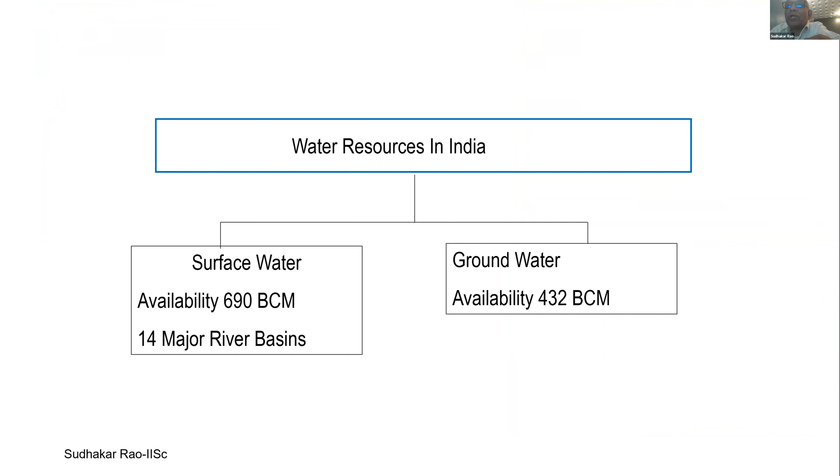So if you look at a snapshot of the water resources in the country, surface water is about 690 billion cubic meters. And groundwater, surprisingly, is touching 432 billion cubic meters. It's almost rubbing shoulders with the surface water consumption in the country. The next slide is much more interesting. Out of 432 billion cubic meters of groundwater, 330 billion cubic meters is used by agriculture, and about 70 billion cubic meters is used by domestic and industry in the country. You would have heard that India is an agriculture-centric country. So much of the water resources goes towards agriculture.

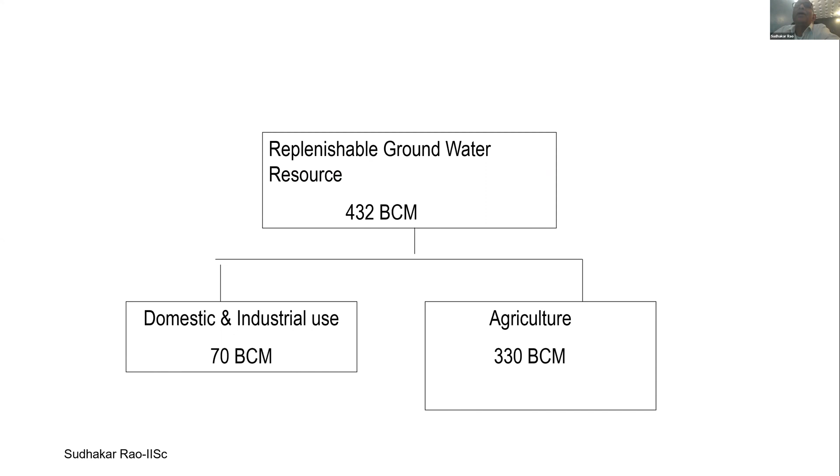Now, I want to focus today's talk on the quality aspects of groundwater. It serves as a decentralized source of safe water, for the reasons I had mentioned, for millions of rural and urban people, and accounts for nearly 80% of rural domestic water needs and 50% of the urban water needs of India. Just yesterday, I saw a snapshot in the newspaper here in Bangalore. It says that more than 200 crore people live in countries experiencing high water stress.

And India, I mean, very sorry to read this, 120 out of 122 countries ranking, we are in the bottommost. And then it says 75% of households across the globe do not have access to drinking water on the premises, and 40% of the people will not have access to clean drinking water by 2030. So besides quantity, I mean, availability of water, quality is also a very important issue. And one of the quality aspects is what I shall be focusing on in my talk as we go ahead.

Now, when we speak of water quality, it has three attributes: physical, chemical, and biological. Physical parameters are color; water is supposed to be colorless. So if there is a bit of a color, you say, oh, the water is not good. Odor; it is supposed to be odorless. And if there is some smell, you feel there is something fishy.

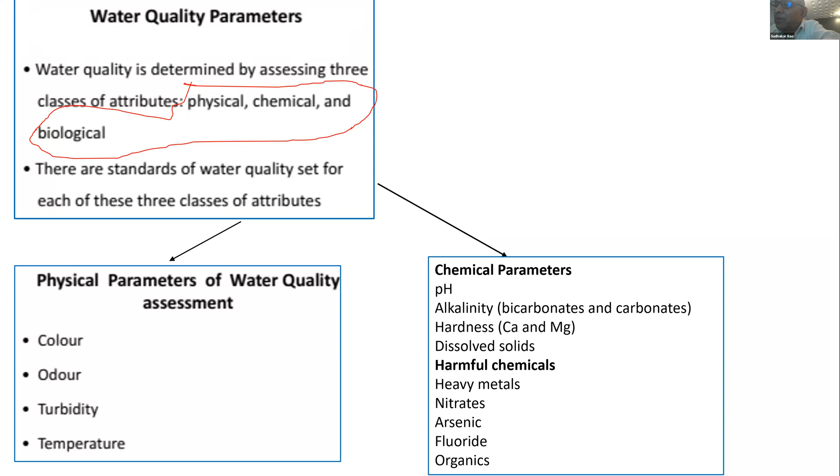Now, just to give you a brief idea, suppose you take a bottle of water, what is it composed of? It is composed of sodium ions, calcium ions, magnesium ions, potassium ions, chloride ions, sulfate and bicarbonate ions. These are mainly coming by the interaction of the water with the lithosphere. It could be the surface soil, or it could be the rocks.

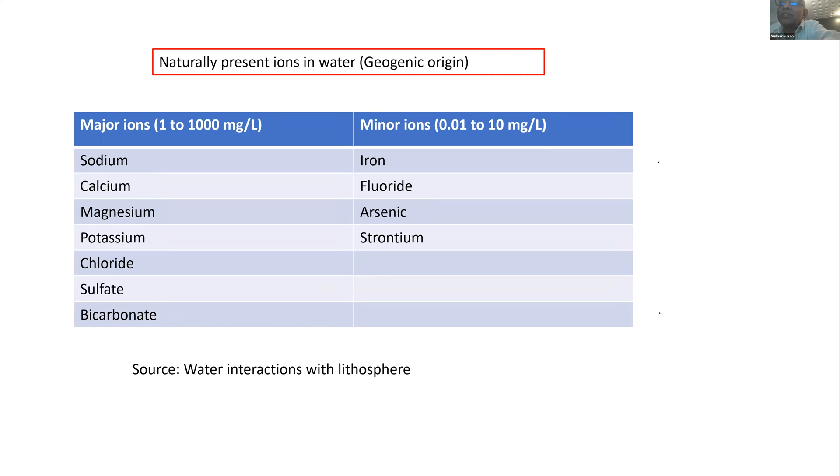And then you have minor ions, that is 0.01 to 10 milligrams per liter: iron, fluoride, arsenic, strontium. A few names are given here. They are very small in quantity, but they are the most problematic. I shall dwell more on this in a couple of slides.

Now, each country has got its own drinking water standard. Most of the countries derive them from the WHO guidelines, the World Health Organization guidelines. In India, we have what is known as the BIS 10500. I have given only a few of the parameters here just to focus on it. There are about 40 parameters, but I'm not listing all of them.

Now, as I go down the table, chloride, calcium, magnesium, sulfate, there are two limits, acceptable limit and permissible limit. The meaning of that is, you would like the water to have this quality, but if there is no other source, a higher contamination could be tolerated. That is the meaning of acceptable limit and permissible limit.

So if you look at, say, TDS, that is the dissolved salt concentration, it says the water should be less than 500 milligrams per liter. But if you have no choice, you can drink water up to 2 grams per liter. That is very, very tough, actually. The lakes and the fresh water and the rivers that we have usually have dissolved salts of about 300 milligrams per liter. So you don't feel the salinity, but sometimes, if you were to travel somewhere, you would feel that the water is salty, and that is because of your dissolved salts.

Now you can look at chlorides, 250 to 1000, very large. Calcium, 75 to 200. And calcium and magnesium are mainly the hardness-causing problems. And then you have nitrate, which is 45 milligrams per liter, and which is my focus of the talk, as this is, in India at least, a recent thing, as to how it is occurring and the implications on health.

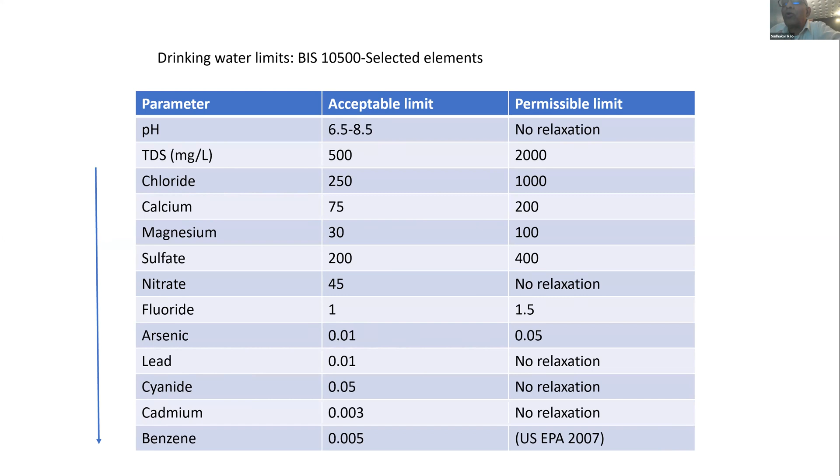Now, what are the sources of pollution of the water? There are two broad classes, as we say: anthropogenic, that is because of human activities, and geogenic, because of the interaction of the water with the rock. Now, if you look at the anthropogenic or human, you have different classes. The domestic pollution, where we dispose our sewage. The agriculture pollution, where you have the pesticides, the nutrients, and the fertilizers. Of course, industrial pollution, many of us are aware of it, disposal of effluents.

And then you have the geogenic variety, that is because of the interaction of the water with the rock. So very prominent examples are arsenic, fluoride, iron, and of course salinity. The nitrate has been wrongly listed here. Nitrate is because of a combination of two aspects, domestic pollution and agriculture pollution. It doesn't come because of geogenic activities. Nitrate in natural groundwater is very, very less, less than a milligram per liter, and it is harmless. But when you have domestic pollution and agriculture pollution, things become bad.

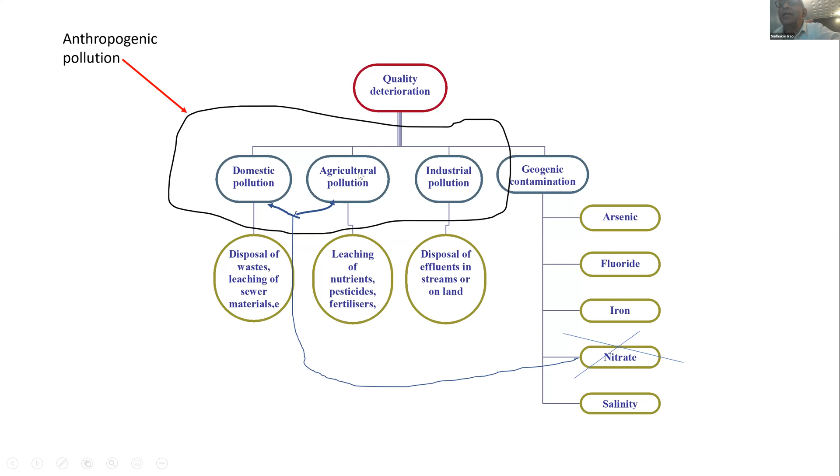So today's talk is on a small town, as I said, Mulabagal. It's about 95 kilometers from Bangalore, not very far. It's a small town, area is about 8.5 square kilometers, and it has been divided into 27 units. And as you can see in the picture on the right, it is like any small town. You have very bad unpaved roads, chaotic traffic, political banners, and so on and so forth. The beauty of this town is it depends on groundwater for its drinking water needs completely.

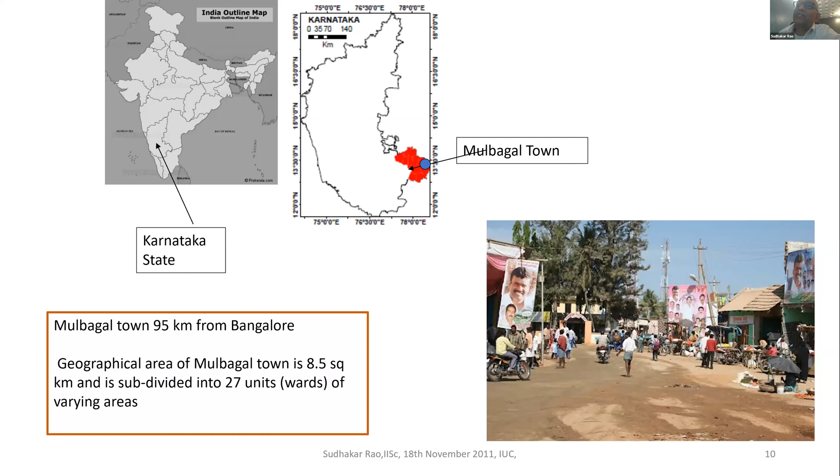There is no surface water, and it has no sanitation that is there in many of the developed nations and the urban centers of the country. That is known as off-site sanitation. I'll come to that. It depends completely on on-site sanitation. I will explain what is off-site and on-site sanitation. So it has got on-site sanitation, and it has got groundwater as the source. Very lethal cocktail, as we shall see in the next slides.

So the town is very small, about 9,000 houses. And there are about 18 slums or shanties, and there are about 10 community toilets. Most of them are non-functional, so open defecation is very rampant. So about 8,000 households have what is known as pit toilets. I will just come to that. Population is about 60,000, so about 5 people per house. And the drinking water that they extract from the groundwater is about 5 million liters per day. So it's a very, very huge number that they're pumping from the ground.

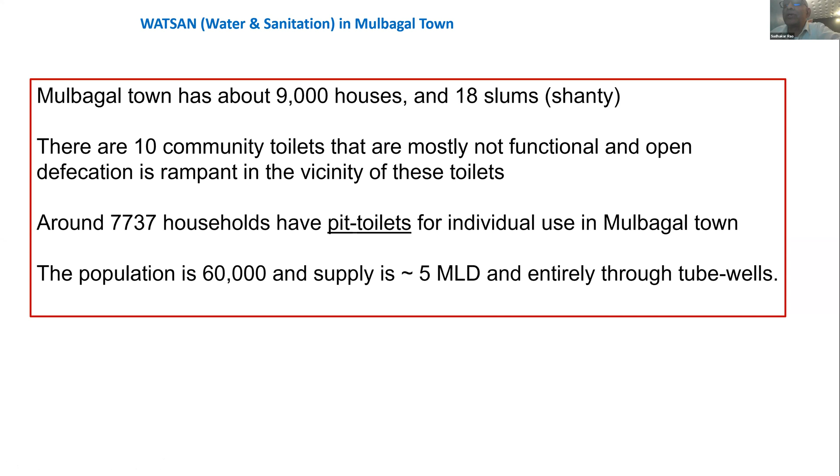Now, I will just try to explain what is off-site sanitation and on-site sanitation. Basically, off-site sanitation means a sewer network that you're aware of, and a centralized wastewater treatment plant. Now, construction of a sewer network needs high investment. About 65% of the total investment is required for the sewers. And this may be a surprise to you, what's new in this, but it is new for many developing nations and for many households in the villages.

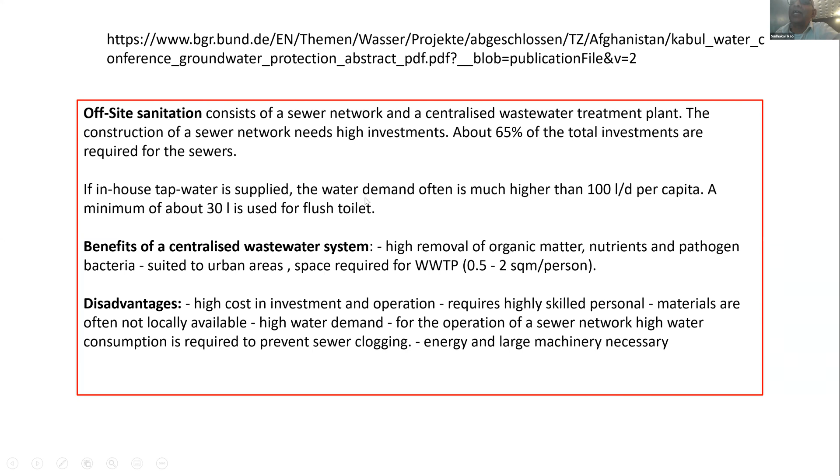If you have in-house tap water, then the demand is about 100 liters per day per capita. That is, in flushing the toilet, we spend about 100 liters per day per person. And minimum flush is about 30 liters per toilet flush. There are of course benefits: high removal of organic matter, nutrients and bacteria. It is suited for urban areas and the space required is about 0.5 to 2 square meters per person. Disadvantages are high cost of investment and operation, highly skilled people, high water demand, and of course large investments and large machinery. And the source is from this website that I have given above. Compared to that, you have what is known as on-site sanitation.

Basically, it means you have a house and you have a toilet and a pit, and the pit is where all the human waste is disposed. So adequate space for locating the toilet and the leach pits, that is the pits from where the waste water will go into the ground.

Advantages: it is simple to construct, operate and maintain, less expensive. I think the government of India has got the Swachh Bharat Abhiyan, and 12,000 rupees is the cost of constructing one such toilet. And the aim of the government is to see that open defecation is completely wiped out. And I think as of today, about 90% of the country is covered by this pit toilet system or the

on-site sanitation facilities. Of course, the disadvantage is the possibility of pathogens leaching into the groundwater and contaminating it, because you're dumping the waste in the ground, you're not treating it. So you are, of course, going to contaminate it, as we shall see in the set of slides.

So most popular are the twin pit toilets, that is, you have two kind of holes. If one gets filled, you flush it and connect to the next. That is what is done. Or you can have a septic tank. That's popular in many countries and many places.

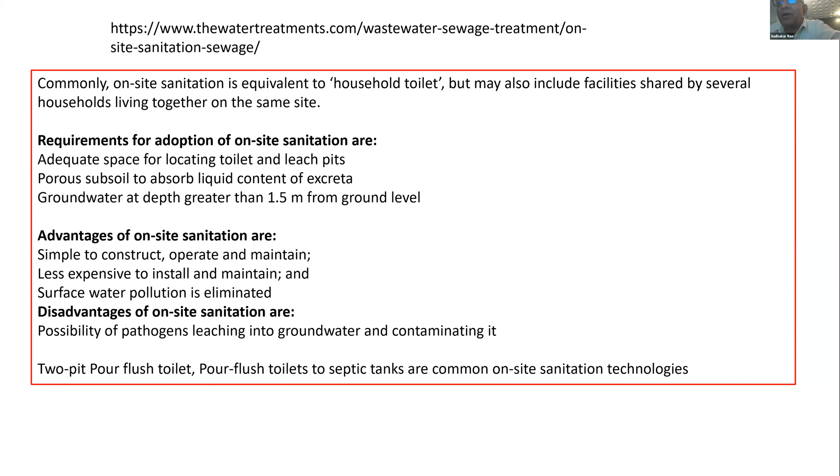So as you can see here, pit toilets not only in India, but serve about 1.77 billion people around the world, and they use pit toilets as a primary source of sanitation. As you can see here, you have the toilet and you have got the pit. The human waste is dumped here. The solids will remain and the liquids will sort of flow. And then you have got the aquifer, and it has got a possibility of getting contaminated.

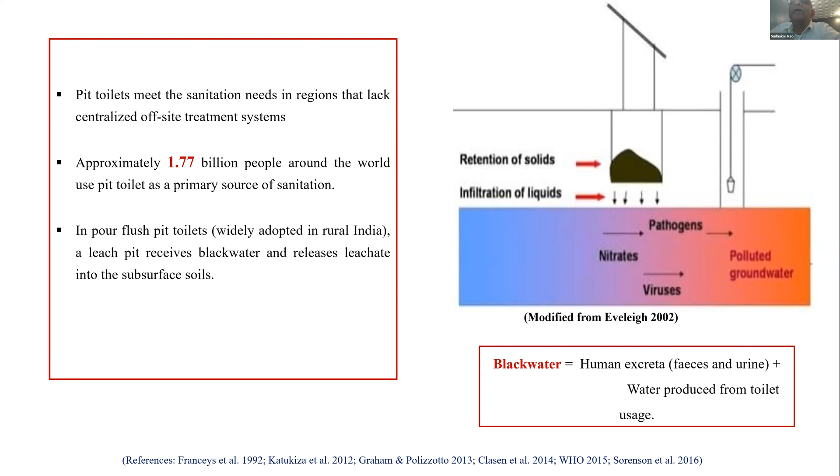Now, black water is basically human excreta, that is the fecal matter plus urine and the water that we use for flushing. So again, more elaboration on that. Contaminants released from the leach pit. As you can see, the flow lines flow from the leach pit and eventually hit the groundwater. And that is our problem.

And that is the problem that the country and many countries that have this kind of system are facing, whether it is Africa. And also, surprisingly, you have parts of North America, you have parts of Europe, where you have isolated communities and they depend on this. And then you have this problem that they're also facing.

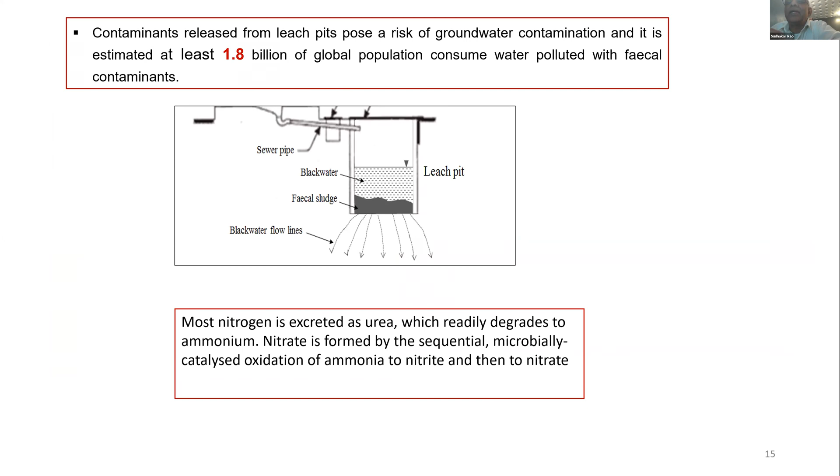And this water, the people are very, very, very smart, resourceful. So the government has spent a lot of money in putting these tube wells inside the town. There is a very high density. I don't have the number, but it's several hundreds of tube wells they have put. Practically every street or every alternate street has got a tube well. Now what has happened is a lot of money has gone into pumping and putting these tube wells.

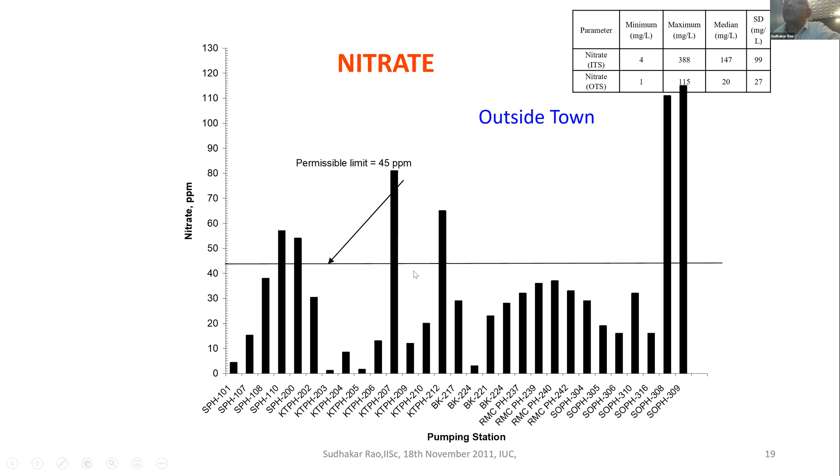So you can see that outside the town, it's not bad. It is less than 45 milligrams per liter for many of the wells. But when I come to within the town, you see it's so high. 45 is here. Many of the wells have crossed the limits for the drinking water inside the town. So of course, when we started the project, this was funded by one of the groups known as Arghyam. They were doing the water management for this particular town, and they approached me to say, let us look at the water quality.

So their suspicion was, this is close to the Kolar district. You must have heard of the Kolar gold fields, some of you. It's close to a zone which is known for fluoride. So they were suspecting fluoride in the water, and they said, let us check if there is fluoride in the water. There's no fluoride, but there's a lot of nitrates and E. coli, which was a big surprise for them and for us.

So this study was a part of the support that was given by the Arghyam Foundation to look at the groundwater quality of that particular town and groundwater management. That was the focus of this 3-year project. And once you get interested, of course you start looking into it, you put your PhD students onto this, and some very wonderful research comes, as I will be sharing with you.

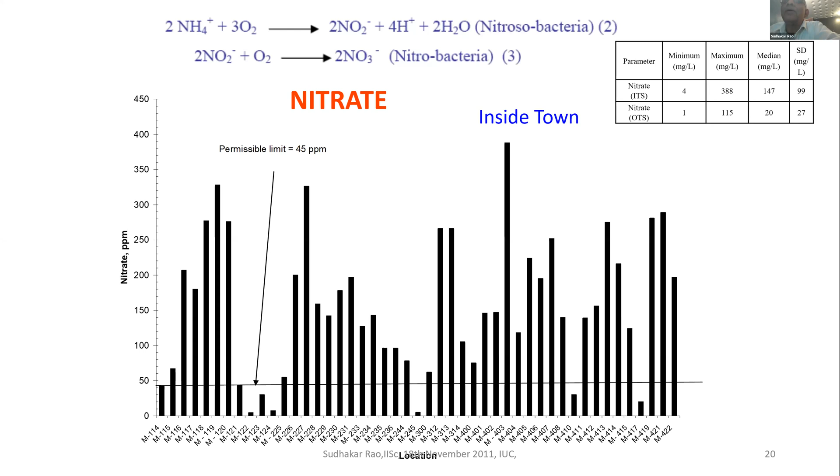Now, you discharge black water, but how does black water get converted to nitrate is a question mark. So the human waste contains a lot of organic nitrogen, and there are two kinds of degradation process. Anaerobic, in absence of oxygen, and aerobic, that is the oxidation that takes place in presence of oxygen. So when the human waste is dumped in the pit, there is no oxygen there, and the organic nitrogen gets converted to what is known as the ammonium ions.

So I will come to this point. When the black water is leached into the subsurface soil, you have got oxygen, and it will oxidize to form nitrate ions. Now the specialty of nitrate is it is very weakly absorbed by the soil particles. There are two reasons. One is the soil particles are negatively charged, so they have an inherent repulsion for the anions, and the anions will go through unless there is strong complex formation, like sulfates and phosphates bound to clay minerals. But anions like nitrates and chlorides easily pass through the soil particles because they don't have a specific bonding mechanism with the clay particles, so they simply travel through.

That's why chloride is supposed to be an indicator in groundwater transport. So likewise, nitrate doesn't bind, it simply passes through. So this happens when the black water hits the vadose zone or the subsurface soil or the unsaturated zone. It hits that zone, and then the transformation takes place.

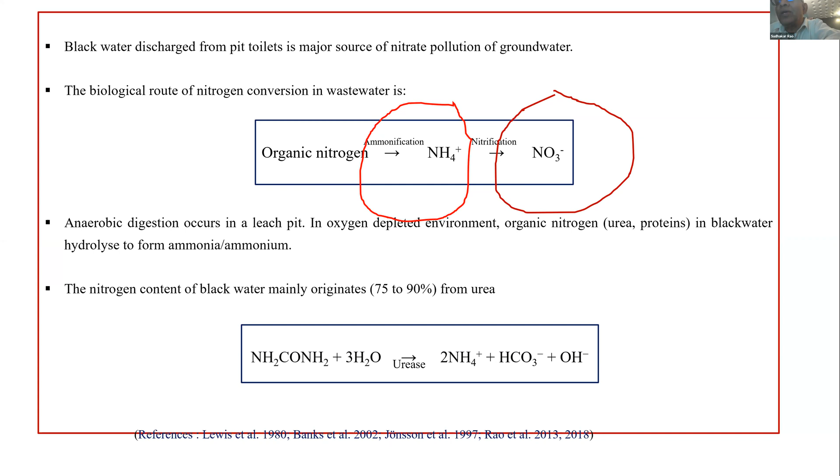Of course, not all the ammonium is converted to nitrates. Some of it undergoes volatilization, that is, it escapes to the atmosphere as ammonia gas, and some of it is adsorbed by the soil particles as ammonium ions, because ammonium ions have a very strong affinity for the soil particles. One, because they are positively charged, and because they have a small hydrated size. As the hydrated size decreases, the affinity of the cation for the clay particles increases. So ammonium ions have a specific bonding with clay particles, so they are preferentially adsorbed by the clay particles.

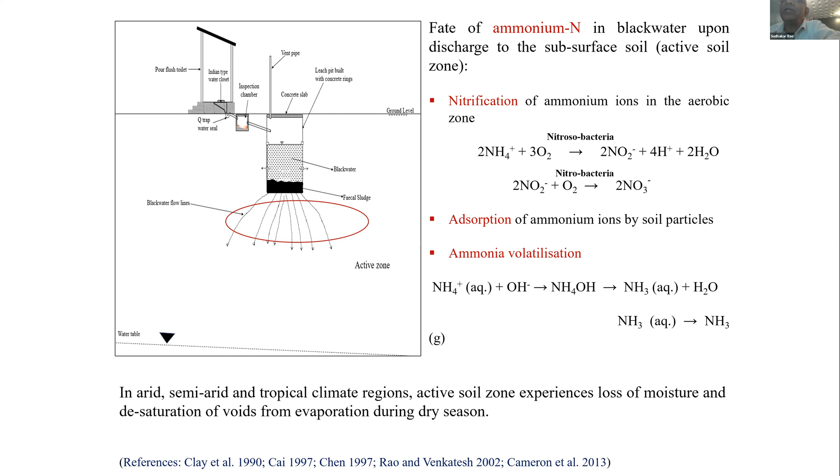So what one of my PhD students did along with my research team is they went actually to the location, picked up the black water from a leach pit toilet, brought it to the lab and analyzed it. Now there are a couple of parameters I would bring your focus to. One is the conductivity, that is very high, 4540 to 7550 microsiemens per centimeter; divided by 1.54, that is milligrams per liter. The second point is the redox potential, minus 298 millivolts to minus 198 millivolts. The median value is minus 255 millivolts.

What it means is there is no dissolved oxygen. It is anoxic or anaerobic in character. There is no oxygen available in the black water, because the organic carbon is so high, everything is consumed. So your dissolved oxygen is low, 0.000 milligrams per liter. And as I said, all the organic nitrogen converts to urea. But surprisingly, there is no urea in the water. It's very small, 3.6 to 8.1. Median value is about 6 milligrams per liter.

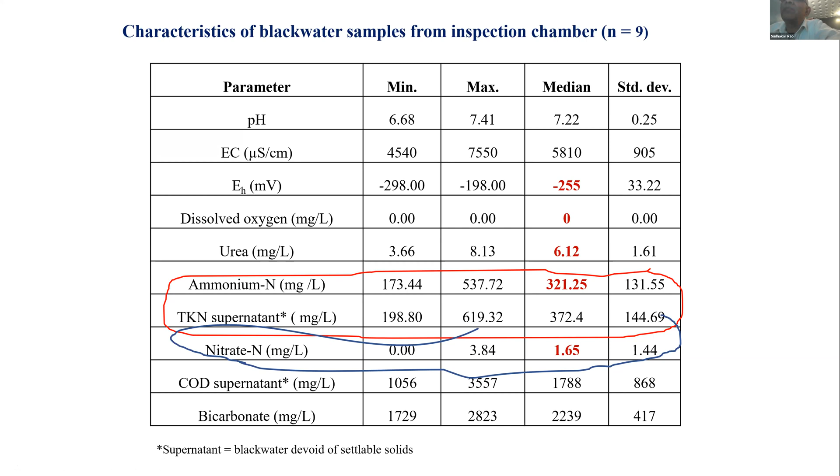But then you see you have very large ammonium ions, 173 to 537 milligrams per liter. The median was 321. So all your urea has got converted to ammonium ions. And because this is an anaerobic environment, there is no oxygen, therefore your nitrate is very low, ranging from 0 to 3.8 milligrams per liter. And of course, you have the dissolved organic carbon ranging from 1000 to 3,500 milligrams per liter. So rich in organic carbon, rich in ammonium ions, and anoxic in nature. That is the characteristic of the black water from a pit toilet that my research staff and students had collected.

So then we said, there is no urea we can catch. So we were curious to see how urea transforms to ammonium ions. What we did is we took the black water sample and spiked it with urea artificially, at different concentrations from 250 to 1000 milligrams per liter, at two temperatures, 25 degrees and 37 degrees, to study the kinetics. You can see that as urea is decreasing, ammonia is forming. The time periods range from 8 hours to 16 hours. They are a function of the time, the temperature, and the concentration.

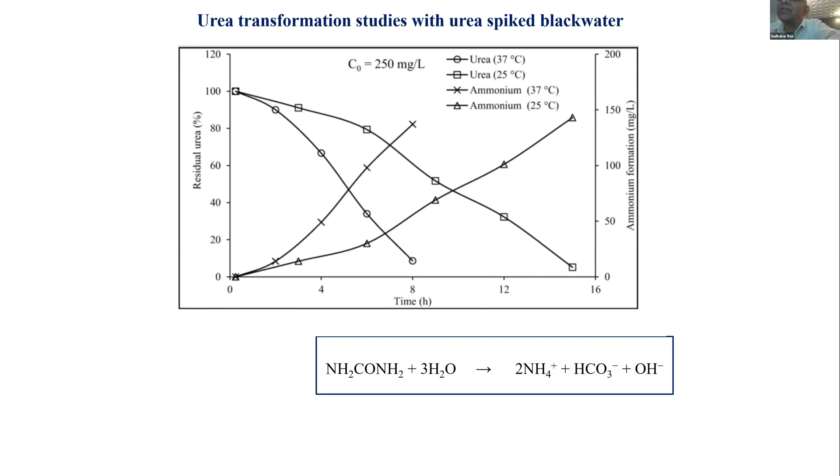So this was a clear proof that you have the black water, you spike it with urea, and within 8 to 12 hours or 16 hours, all the urea gets transformed to ammonium ions, and that is your source of ammonium in the black water.

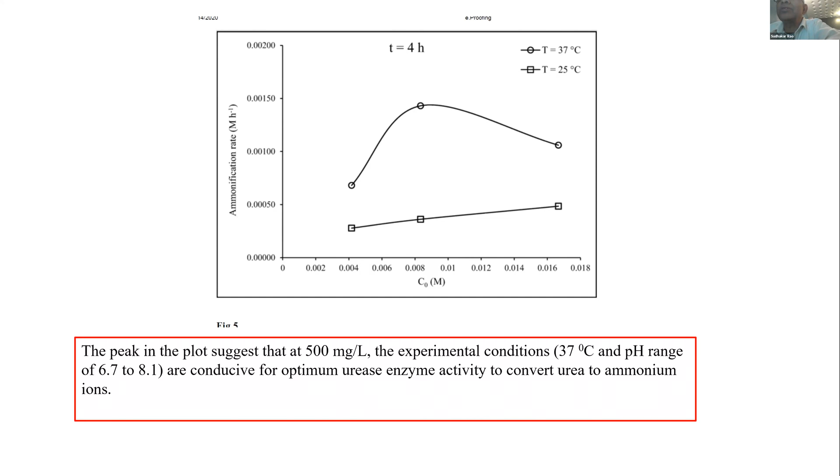So we further did some examination as to what are the optimum conditions for the ammonification rate to take place. For our conditions, we found that at 500 milligrams per liter and 37 degrees centigrade, the urease enzyme activity was optimum, because you can see a peak here forming, which was not there at other concentrations and at other temperatures. So we wanted to explore the optimum conditions under which these reactions take place.

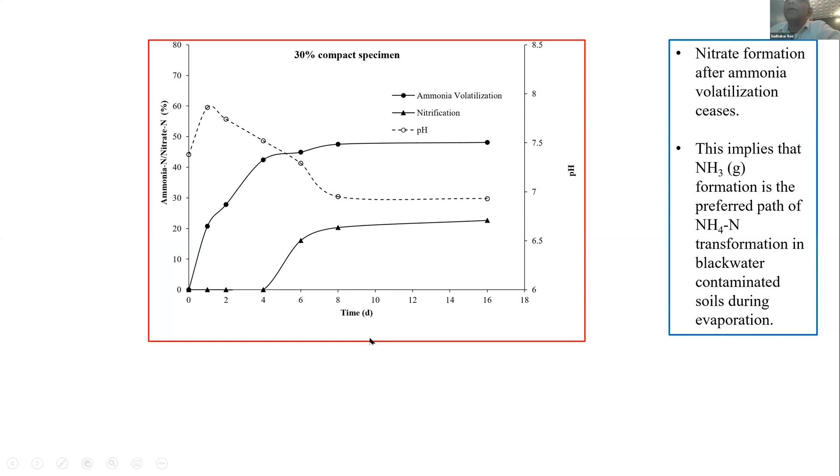But what we see is only about 23 to 35% of the ammonium ions get converted to nitrates. This is because you have got low water content that is not conducive for the bacteria; they will dehydrate. And then you have got low dissolved oxygen content. So low dissolved oxygen content and low bacterial activity are primarily responsible for the low conversion of ammonium to nitrate ions.

So then we thought, with this knowledge, can we build this scenario in the Mulbagal aquifer that we observed was having very high nitrate contamination? We did a lot of lab experiments. Now you transform the lab experiments to the field data. Whenever you have to extrapolate the lab to the field, you have to make a lot of assumptions. Some were based on the laboratory facts, and some had to be based on the census and so on.

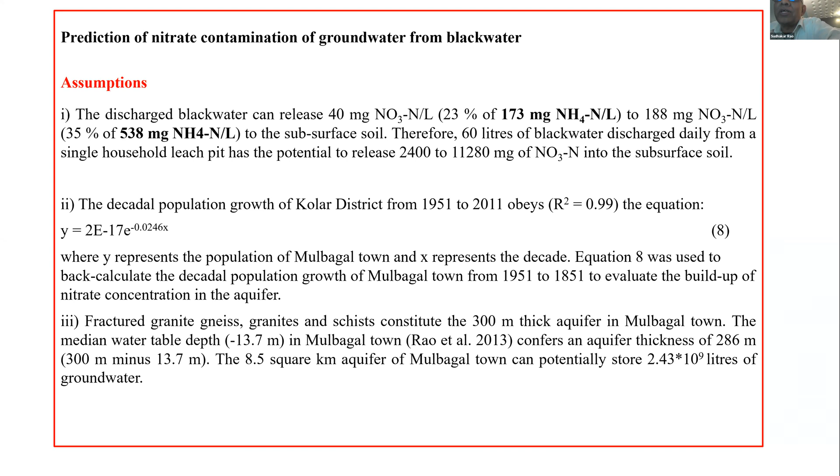So we calculated, if the town has this kind of area and this kind of depth, what is the storage capacity of the aquifer. A simplistic assumption; I will put some more assumptions. We know that nitrate can arise from fertilizers also, but we assume that all the nitrate is coming from anthropogenic or black water contamination, and that the decadal population growth in Mulbagal town is in accordance with the equation that we had formulated.

Again, we assume that only 5 people stay in a house throughout our calculations. It's a simplistic calculation, but in the absence of data, you always have to make some assumptions. And the volume of water available in the aquifer is constant throughout the computation period of about 100 years. So these are some of the assumptions we had to make to calculate how the nitrate concentration in the aquifer has built up over a period of time.

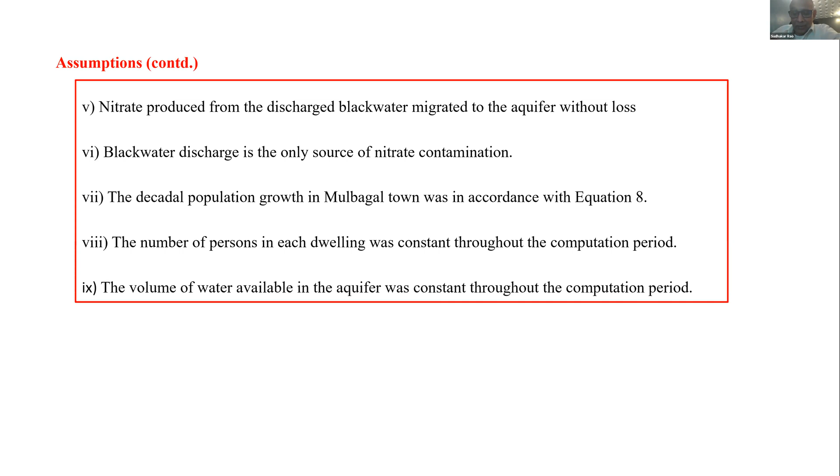But the interesting point is it takes nearly 100 years, or between say 10 to 100 years, you can take a guess. It's very difficult to guess. It takes several decades, I would say, to be on the safe side, for the aquifer to get polluted by the nitrate, by any leachates that are coming out of this thing. And we have to remember that nitrate is not a very preferred ion, so it simply travels down. So one can get a picture as to how many decades it has taken and what are the causes for the nitrate to contaminate the aquifer.

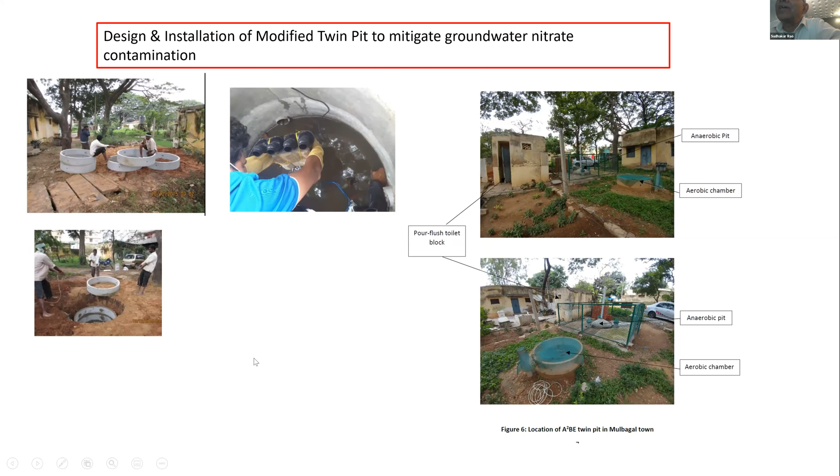Now, design and installation of the modified twin pit to mitigate the groundwater nitrate contamination. This is how the pit is built. You have these concrete rings and then they install it. And then we did a lot of modifications, and I shall come to them. So this is our modified barrier. You have the conventional anaerobic chamber, the conventional pit where the water flows. We sealed the bottom and the sides so that water cannot flow out anywhere, but it has to go to the next chamber.

So this is our anaerobic treatment chamber where it undergoes anaerobic decomposition as in a conventional pit, but we do not allow the water to escape. We take it further and treat it. We then took it to the next chamber, known as the aerobic chamber. We installed an aerator there. If you can look at this, this is the aerator. We had electricity supply there, so we ran the aerator so that all the ammonium gets converted to nitrate in the aeration chamber.

And then when it's aerated, all the ammonium is converted to nitrate, then we allow it to pass to the chamber below this, where we have got a biobarrier, a mixture. We used here a mixture of soil, sand, and cow dung, because cow dung has got a lot of denitrifying bacteria. So we said, let us prepare a barrier containing sand, because the water has to flow, and then you need a source of organic matter. Cow dung has a lot of organic matter and a lot of denitrifiers.

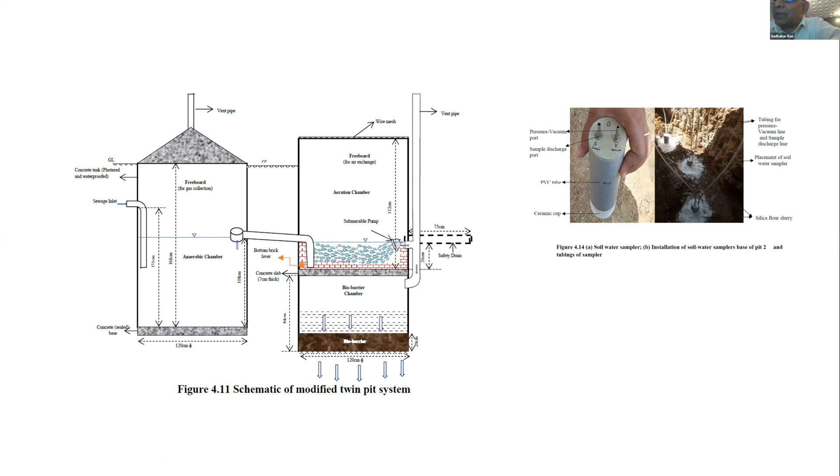So I said, why not install it and see what happens. So when you do this, the water that is coming out is supposed to be clean water. So what is the proof? We installed these suction lysimeters all around, and we are sucking out the leachates and monitoring the quality in the laboratory to know how our barrier was working. So the next set of results, I will share with you.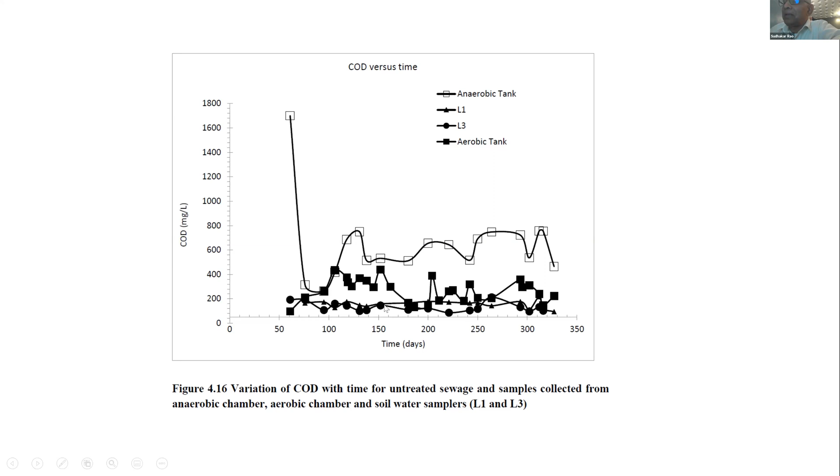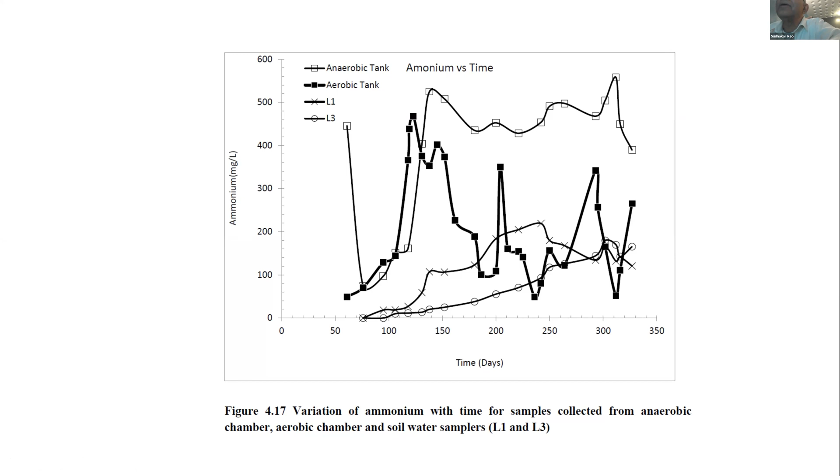So what we actually did is a decentralized wastewater treatment system in a very small pit, so that the aquifer is protected from the nitrate. Before this we had done defluoridation also, where we were trying to remove the fluoride from the groundwater. Here we tried to run an experimental twin pit. Once the funding is over, of course, you have to dismantle. After 365 days, no money, the funders say your project is over. Nobody takes it forward, so you dismantle everything and bring it back to the laboratory. But very good learning: in 365 days, it is doable, is the lesson that we learned.